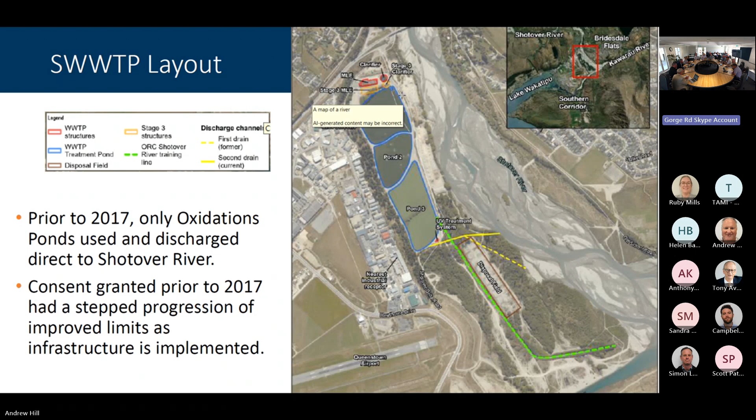In terms of the upgrades in recent years, there was considerable investment from QLDC starting back in 2017 or before, with stage 1: the modified Ludzack-Ettinger activated sludge process - I'll refer to that as MLE from now on, and the older one since 2017 we'll call MLE1. Constructed in 2017, the idea was that it would process about 80% of the town's wastewater through that MLE process.

The remaining 20% went through the oxidation ponds, then they'd get blended at the end prior to UV treatment and disposal. Stage 2 was the dose and drain disposal field - that's the field that failed and was diverted earlier this year. It came online approximately 2019, with the idea being that the treated wastewater was disposed through that field as a land discharge.

Stage 3 has recently finished, or the main parts have just finished - that's the second MLE, the one in parallel that you see there now. Now that it's done, 100% of the wastewater for the region will go through either of those MLEs. It's designed out to a 2048 population forecast, and shown in green is the construction cost investment.

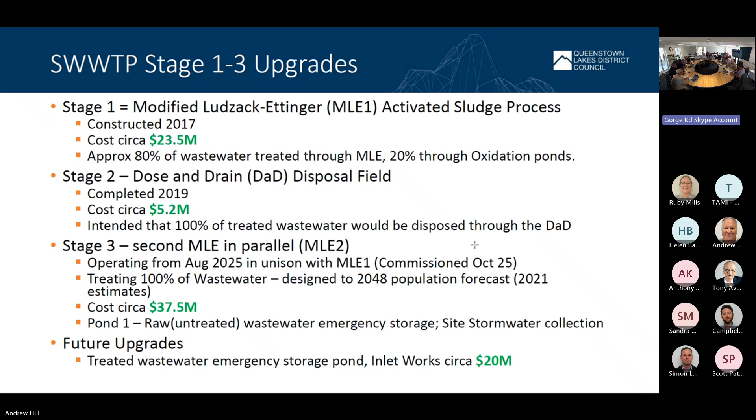There's also, as well as the disposal project, money set aside for future upgrades. One of those is a treated wastewater storage pond, often referred to as a calamity pond, and also some upgrades to the inlet works there. I'll talk a little bit about that emergency storage pond later as well.

Really to give everyone, again, a 101 about the process. So the raw wastewater comes in on the left-hand side. There is an inlet screen, which is off the picture here, which essentially gets rid of the big stuff out of the process. It then puts it into the reactor, and then you have two separate tanks there.

One of those essentially starves all the matter in there of oxygen, and that forces various breakdown and chemical reactions to occur, and then it moves into a stage where essentially an oversupply of oxygen, which then further influences that biological process. Think of it as a sort of a living organism that's got stuff moving around all of it, and then at one point you're depriving it of oxygen, so it gets really hungry, and the next minute you're oversupplying it, and it just goes kind of crazy in terms of eating.

So it's a living organism in that way, and the whole idea of it, when it gets to that clarifier tank, is that that biomass, the living organism, has essentially soaked up the majority of all the solids and that type of thing in there, and then that sinks to the bottom and allows in that clarifier all the remaining treated wastewater to be taken off the top. That then goes through a UV treatment, which is sort of a final element of disinfection, prior to it then being discharged to whichever the appropriate sort of discharge is there.

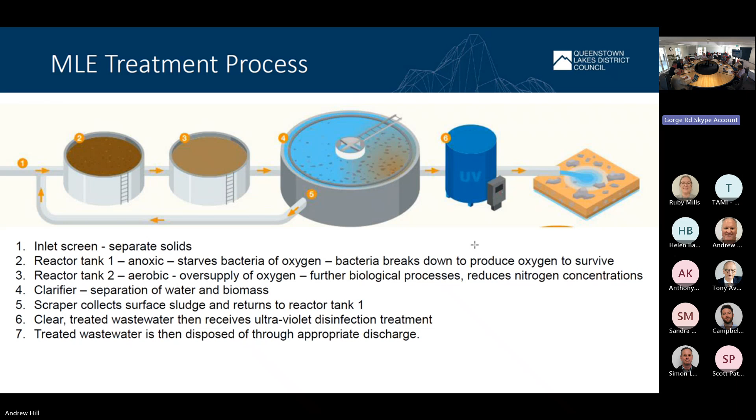Couple of photos there. On the left-hand side is that MLE2, I think this was taken as part of the commissioning there. You can actually see in those chambers, the first ones, there's not a lot of air, not a lot of bubbles in that, and then those subsequent chambers, that's where the oxygen is introduced. The large circular areas at the end are the clarifier tanks where that final stage of the process works.

On the right-hand side there, we've got a quick schematic. That's the old pond one, so it's just to the Kawarau River side of the two MLEs. The left-hand side of that is being established, and this work's still ongoing, as a raw wastewater emergency storage or calamity pond. Essentially, if you've got a fault at the plant and the plant can't process the raw wastewater coming in, that allows a diversion to be held in there for a certain period of time, and then it'll get pumped back through the plant once it comes back online.

The right-hand side is being set up as a stormwater catchment. There's a lot of stormwater that comes off sort of Frankton Road and Glenda Drive and that into the site, as I understand it. So that's been set up to capture that and allow that to drain away.

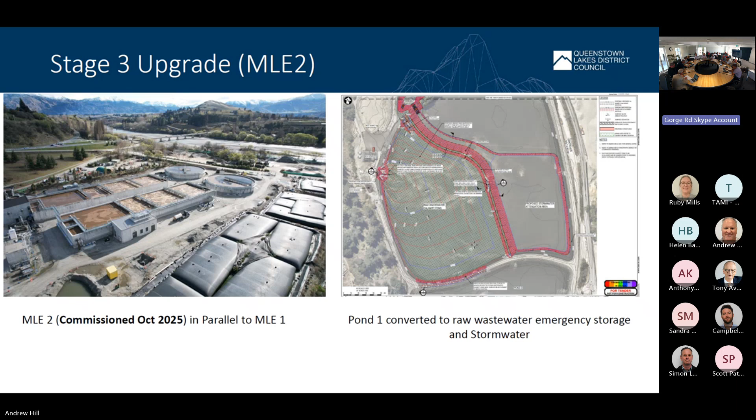A lot of numbers in here, and I'm not wanting to go into detail around them, but I guess what this is trying to show is the improvements in the discharge requirements as we've introduced new infrastructure over the years. So prior to 2017, as I say, it was oxidation ponds and going to the Shotover. From 2017 to 2025, that increased or essentially improved standards there in terms of volumes and elements of nutrients and that sort of thing.

And then another step change from 2025 to 2030, which is when the second MLE comes online again. For 2031, we were looking at that in terms of the potential new improvements that we think we could possibly get going forward as well. We obviously still need to do a bit of work on that with the final options.

I guess the key thing here I'm wanting to show is that the improvements in the discharge quality really come from investment in the treatment process itself, rather than the disposal process. The disposal is really about returning the treated wastewater, or the remaining water, to the environment where it essentially originated from.

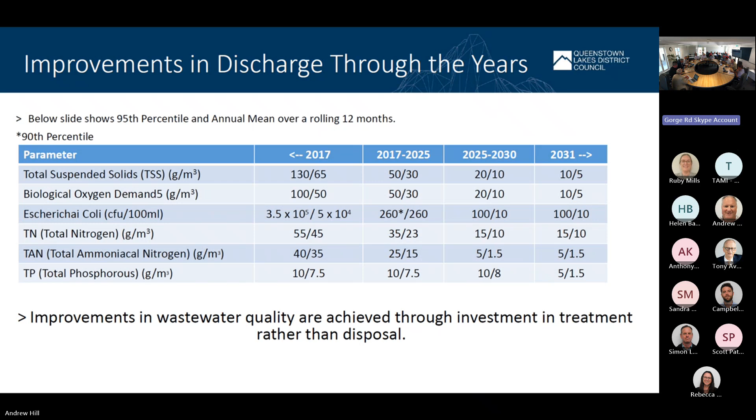Next, we're going to talk a little bit about the old disposal field, the failed disposal field. We'll talk through emergency enforcement order and emergency discharge. The old disposal field is referred to as a dose and drain disposal field.

The picture on the left-hand side shows what it's made up of: a series of buried plastic chambers, about 11 of them down the delta, with the idea that treated wastewater is dosed into each of those chambers and then allowed to drain away through the riverbed into the groundwater, eventually finding its pathway out to what we believe is the Kawarau River.

The idea behind it was that it would be fully buried. The picture on the right-hand side shows it shortly after construction, where all you can see above it is a couple of standpipes and manhole covers. What it's actually made up of is these plastic chambers buried under the ground that allow the treated wastewater to be dosed into them. The idea is that you dose them, then allow time for them to dissipate and essentially rest.

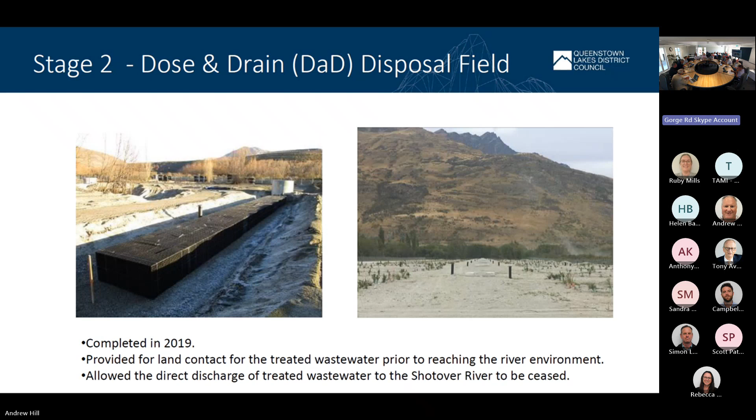The challenges that really came about, and the reasons why we believe it failed: one is that in this area, there's not a lot between the actual disposal field and the groundwater. There's quite a high groundwater table there, so there's not a lot of capacity for the treated wastewater to soak away into the ground.

The second thing is around those buried plastic elements—there's very little access for maintenance. So what kind of happened is a lot of the fine, dusty materials on the riverbed got clogged up, and that, combined with some of the suspended solids out of the treated wastewater, just bound up and left a gluggy layer of stuff that prevented the treated wastewater from draining away through the disposal field.

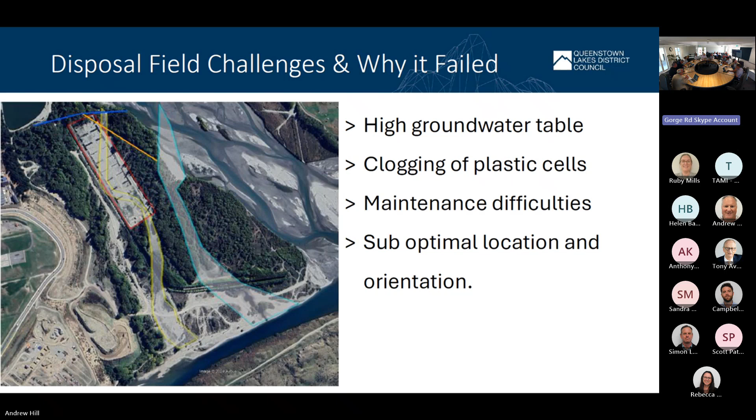If you want to speed up, we're going to run out of time. Yeah, run through—maybe let's do the past more than the future. Yeah, let's take them as read. Quickly skim, and we'll come back to any questions if that's okay. We've got, obviously, we will not make it through.

Disposal field challenges—as I say, we've talked through a few of those. We don't think that the actual old disposal field is able to be reused. Its capacity is so limited that we don't think it's viable as a long-term solution.

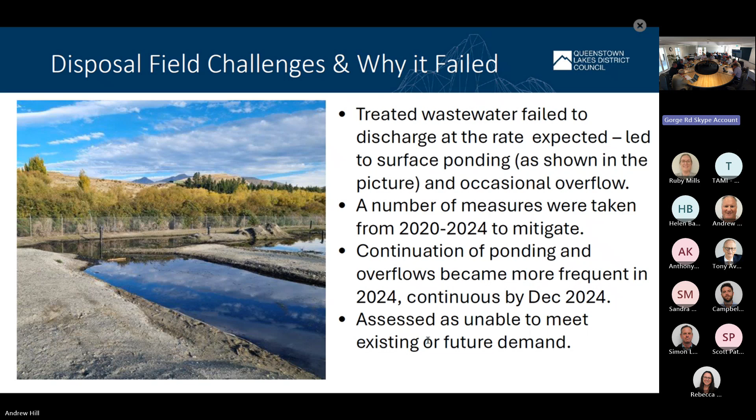As part of that, and even before that, we are undertaking our own sampling of groundwater and surface water on the delta, and that information is available on the QLDC website. A snapshot of that is up there.

This is really good. I think it shows where the line essentially drops flat and runs along. That was the implementation of the MLE2.

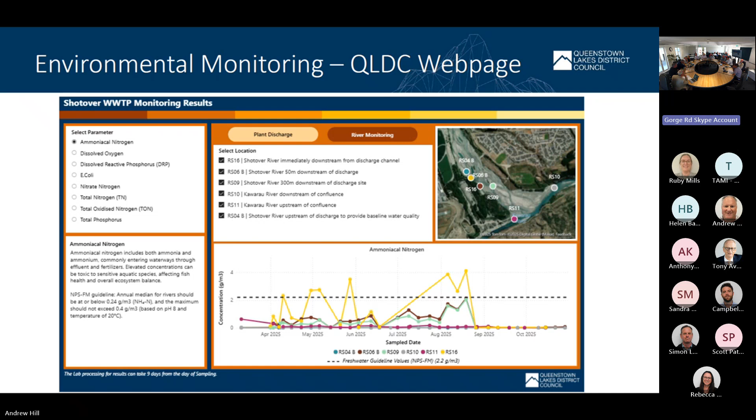Emergency works, no surprises. The chief executive signed off on that the 27th of March. Due to the failure of that and an increasing aviation or bird strike risk, the emergency works commenced 31st of March, and we're now undergoing a resource consent process for that. It's been publicly notified and likely an Environment Court hearing in the new year.

There are 2 resource consents being sought there. One is for the actual discharge. The second is for a diverter minor channel. I just want to be clear on that. It is simply what's shown in the left-hand image there, an excavator scraping back to divert a small portion, about 2 to 2.5 cubic metres per second, and that aids with the mixing past the discharge area.

So the far right-hand side of that orange line is where the treated wastewater discharges into the Shotover, and the key thing there is to try and enhance that mixing at that point of discharge.

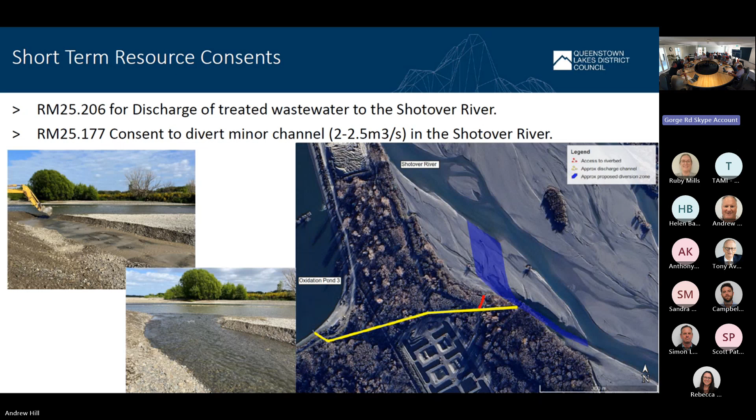Right, questions on basically anything we've covered thus far? No, we're short of time.

But back in the recommending report, when this field was actually dealt with by the ORC before it got its consent, that report says the disposal field is designed to provide for expansion which will occur in response to how well the field is coping with flows and to address projected increases in discharges over time. It is the applicant's stated intention to monitor groundwater mounding and treat this initial disposal field as a full working trial in order to set design parameters for future expansion. What happened to that?

So I guess my understanding of the planned expansion was to expand further to the south, which would just continue to exacerbate the issue. So from the work that we have done subsequently, there appears to be flaws in the original thinking around that disposal field and how it would have been expanded.

And have we done any soakage tests on the field? So now it's drained, have we thought about potentially remediating one of the cells, blocking it off, doing a soakage test? We haven't undertaken any soakage testing since the field's been commissioned, but we have worked with our experts to understand what the capacity of that area would look like, and that was one of the long-listed options considered, which hasn't been deemed an appropriate or sustainable long-term solution.

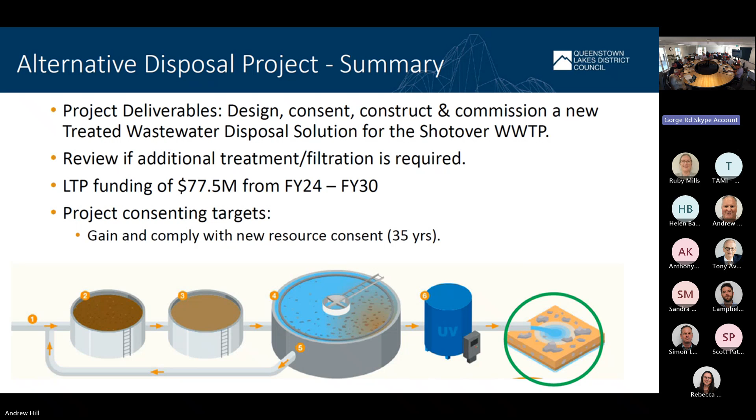Continue - great, thanks all. So looking at the next stage, it's around our long list options for the alternate disposal work. Really, as it notes there, this project is looking at the long-term disposal solution for the Shotover wastewater treatment plant. As part of that disposal solution, we're also considering if additional treatment or filtration is required to meet varying consent standards. The LTP has funding allocated of 77.5 million, as it notes there, and what we're seeking out of this is a 35-year consent, which is the industry standard under the new legislation.

This next slide just shows that we've started as wide as we can in terms of our analysis of options - the gap analysis and determining a basis of design. We went through a wide options assessment in the early stages late last year, which narrowed it down to 13 options on our long list. Essentially there was 8, with some sub-options of each. That occurred up until April, when we had our workshop and then presented to the council.

Since that time, we've been working through our shortlist options analysis of those 5 options, delving into them in much more detail to really understand the nuts and bolts of what they may or may not look like, and if they're achievable. From October of this year, we've had our analysis workshop within the project team, which has scored all of those shortlist options, and we're now working through a process to identify a preferred option, with the target being to have that confirmed by March.

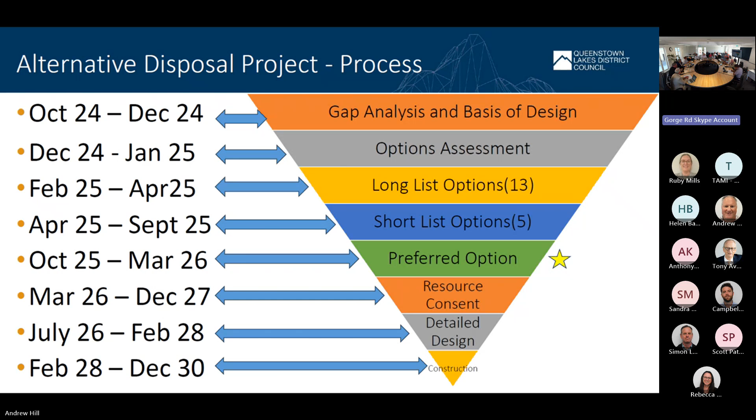We then need to go into that resource consent timeline, and we've got a reasonable amount of time to undertake that resource consent. We're planning that we may need to go through a fair bit of a process with that, which we can talk about a little bit later. From there, a lot of these activities are happening in parallel. We go through the detailed design of that consented option, and then construction, with it being in place by December 30, is the process we're trying to follow overall.

We asked a little bit further about population forecasts that we're looking at. So these are the updated forecasts, the key numbers we're now working on out to that future 2060 number, compared to recent population projections. So essentially, we're looking at a doubling, or slightly more than a doubling, of everything over the course of the next 35 years in terms of the numbers.

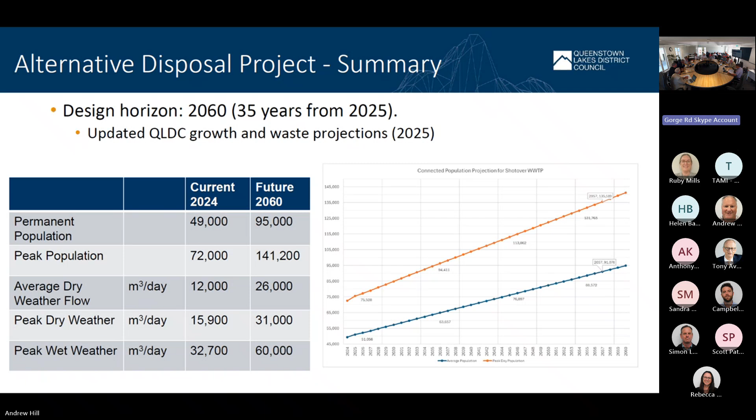Just to put that into context, our current average dry weather flow is 12,000 metre cubed a day. That's the equivalent of around 5 Olympic-sized swimming pools per day of actual treated wastewater we're discharging. That will go up to 10.5 Olympic-sized swimming pools at our 2060 average daily dry weather flow.

And to bring it back to a point you raised earlier, the current treatment capacity sits somewhere in the middle. So there will need to be an increase in that treatment capacity sometime between now and 2060 to plan for those numbers.

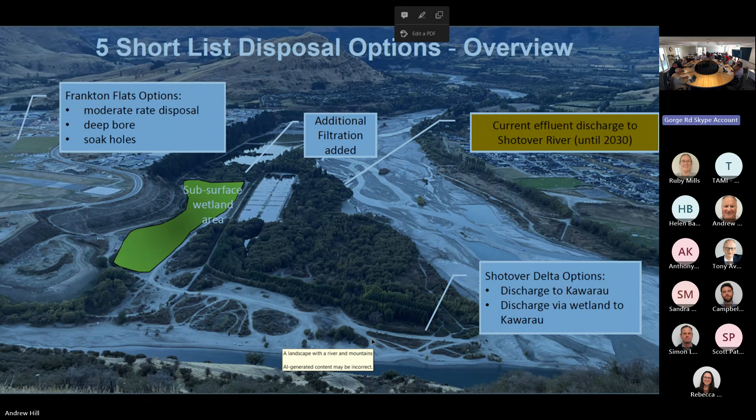I can go through that a little bit later if you like. Are there any questions on the long-term disposal, the long list options? A couple of questions, if I can jump in.

Just going back to the flows. So we're looking at the peak wet day flow being doubling the peak dry flow. Is that because we're treating stormwater, or because people use more water when it's raining, or because we've got 100% infiltration and inflow? That is an allowance for normal practice, I&I, so infiltration and inflow. So with that, it's still relatively low.

So the reality is we've got twice the amount of volume to manage. That's not the current performance. We are fortunate that the network's relatively young, but it will age, and typically it will get worse. We will obviously do everything we can to continue to renew and invest in managing I&I, but the responsible thing to do is to make a reasonable allowance based on industry norms.

Just following on from that, as the plant operators would tell you, having a consistent quality of influent is pretty key to safe operating of the plant. So if we're having very variable influent when it rains, that has its challenges. What's our response to that?

The plants are designed to manage the peak flows that come through with wet weather. Whilst wet weather generates higher hydraulic flows through the plant, that's at a lower load because it's more dilute, so that takes some of the pressure off. The more significant challenge for a district like ours is the peak populations that come in as a step change, such as for Christmas and New Year and certain holiday periods in the ski season. They are more challenging because they are genuine additional load on the treatment plant, which requires more careful management.

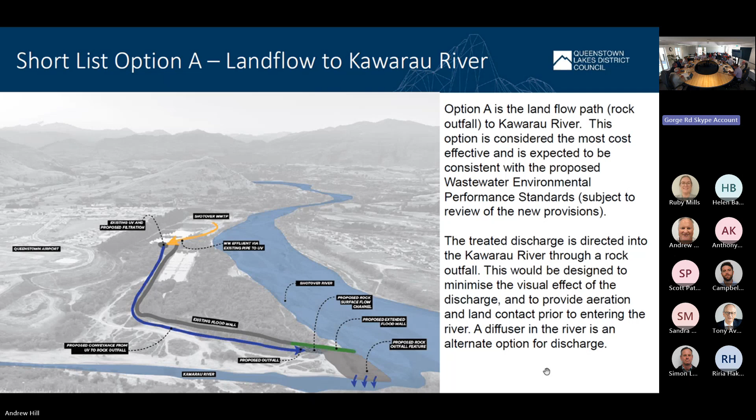But essentially, you won't see any water on top, that's how it's designed. It's essentially a lined wetland, so it's not designed for the water to soak through it into the ground. It's designed for the treated wastewater to pass through on a horizontal basis.

It's filled with gravel material that allows a certain volume to go through, and it's got plants in it that can draw nutrients from the water that passes through. We've talked specifically around designing it in a way that doesn't attract birds, for airport risks, or insects that would then attract birds. So specifically, and we're only at concept design at this stage, it's around avoiding surface water and avoiding attracting any birds into that area.

So careful selection of the plant species becomes important, for providing treatment. I guess the nutrient levels in the discharge mean there's not a lot of nutrients for the plants to take up, so you wouldn't expect any significant difference. It's more for providing some kind of land contact. But the water's still going to go out the other end, and it's still going to go anyway.

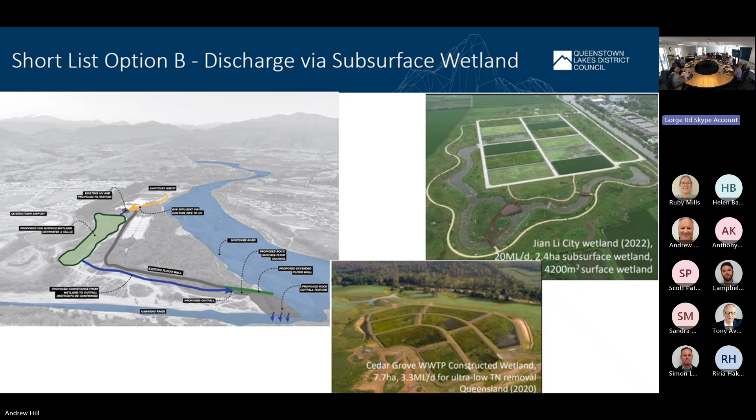So there is a longer term piece of work for our strategy team looking at our strategy for wastewater servicing. We have explored in great detail the opportunities for land discharge across the basin, and they are incredibly limited. Having a whole series of distributed treatment plants doesn't change the land take available and the challenges with the availability and suitability of that land. A huge swathe of the basin is within the Lake Hayes catchment, and that's basically unable to be used because it's already got a zero threshold for nutrients.

So beyond 2060 then, how much wastewater are we considering might be pumped into that river? I'm not sure. If we go down this route now, we sort of potentially lock ourselves in while we're doing a piece of long-term strategic work.

So maybe I can try and answer that. The two MLE plants that are now online are designed to get to '48—not 2048, it will be less than that. We need to be able to dispose of the treated effluent; this is what this disposal process is about. There are very few options for that. We are doing more work around the longer term wastewater needs across the district, but we're still going to need plants that deal with our current load.

Whether we extend the treatment at this particular site and continue to centralise is a question we're working through—we've got some time to work that through. This process is about making sure we're able to dispose of the current flow that we know is going to hit that plant. There's another bit of work looking at the broader question. We've also got a number of developers proposing to do their own treatment based on their own needs in various locations around the district; we're working that through. So whether we continue to bring all of that into the central location or do more dispersed treatments, we're still working through. But to be clear, we need to get this sorted so we've got capacity at this site out to 2048. Sooner than that, that's what this process is about.

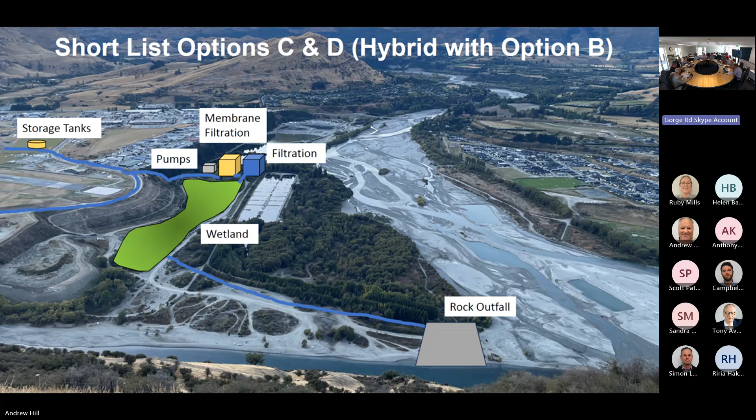We need to do those investigations, proof of concept, before we fully invest into them. So option C and D both look like this, with option B being constructed up front, and then the infrastructure being taken up to Frankton Flats, including additional membrane filtration, pumps and storage tanks up there. Even that is undertaken as a staged process, which I'll go through shortly. But that's how option C and D, when we've assessed it, is a hybrid of B and either C or D.

Can I ask a quick question? The filtration and stuff that you've got in this picture, is that assumed for option A as well? Yes, the membrane filtration, which is additional, is for option C and D only. Why could we not put that into option A? What's the reason, down the track?

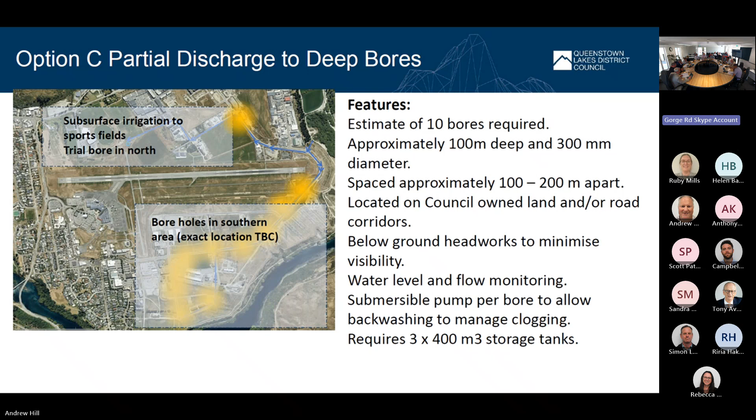So option C is the deep bores. Once, imagine the previous slide, it gets it up onto Frankton Flats. We believe we can utilise the council-owned land corridors and that type of thing around there, looking at a total of 10 bores, each at a depth of roughly 100 metres. Essentially, eventually, to make this work, you'd need 3 large storage tanks up there. Once the treated wastewater has gone through that additional membrane filtration, it's stored up there and then dosed down each of these bores. The reason for 10 bores is that some of them can be offline to allow those to rest as well.

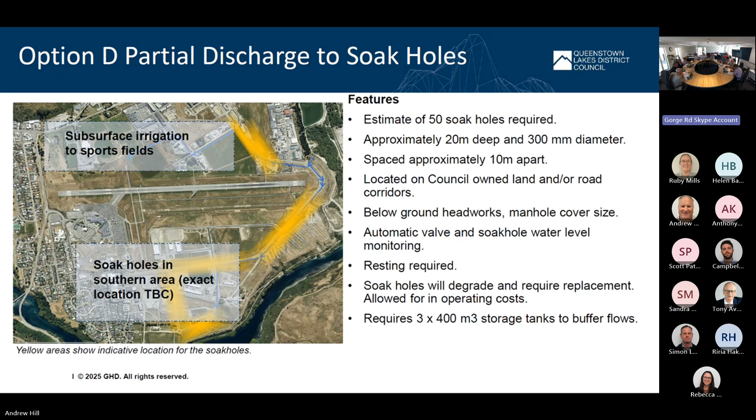Option D is very similar, except it's using the soak holes. The difference is the soak hole only goes down about 20 metres, and as I said before, it then lets the wastewater drain away and percolate. Because of that, the capacity of each soak hole is less than the bore, so we need more of them. The analysis and costing we've done is based on 50 soak holes. You could do more to get greater quantity, but you've still got that head of the aquifer capacity we need to consider. Similar type arrangement there though. We think all of that can go into the roading corridors without the need for land, except maybe the space for those storage tanks, which may be the only element where land is required.

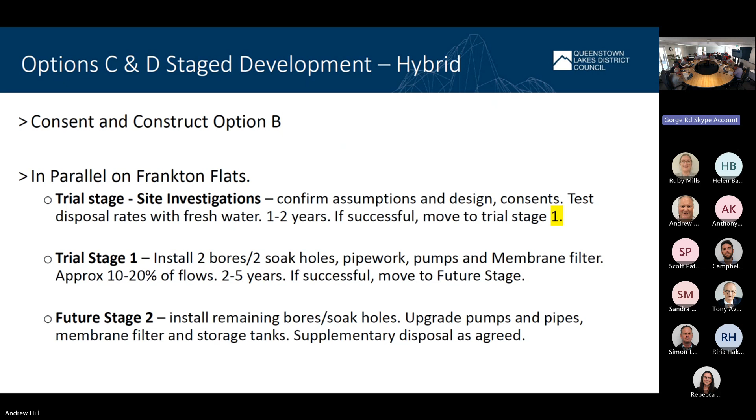If that's successful, then move to stage 1, which would be starting to build some of that infrastructure I showed you in that earlier slide to get it from the delta up onto Frankton Flats. Looking at perhaps 2 bores, 2 to maybe 5 soak holes, and then essentially doing a proof of concept up there before, and again, if that proves successful, moving to that future stage of the full componentry. So that's how we see that flowing if option C or D were progressed.

You'd still have to invest in the pump station, right? Yeah, and I think between those 2 stages, there's a smaller one, or I think it's a second one in parallel added for the later stage. Yeah, but I guess that investment at trial stage 1 is significant. Yeah, it is.

An overarching assessment of the environmental impacts for all options, noting that all options on the shortlist now include some form of discharge to the Kawarau. A key highlight is that once mixing occurs, there won't be too much variance between them environmentally.

There's very little improvement in nutrient concentrations achieved from the failed DADs, particularly in some of the nitrogen and ammonia we put in at the top end of the DAD, we're seeing the same stuff coming out along the Kawarau River. This suggests that land disposal as we've currently known it has very limited benefits in terms of those nutrients.

Certainly for the polishing of any remaining suspended solids, the disposal field would reduce the virus load in the treated wastewater. Viruses are one of the things with pretty limited treatment in dealing with, so that's one of the main risks, and why there's a need to ensure adequate mixing with the treated wastewater once disposed into the receiving environment.

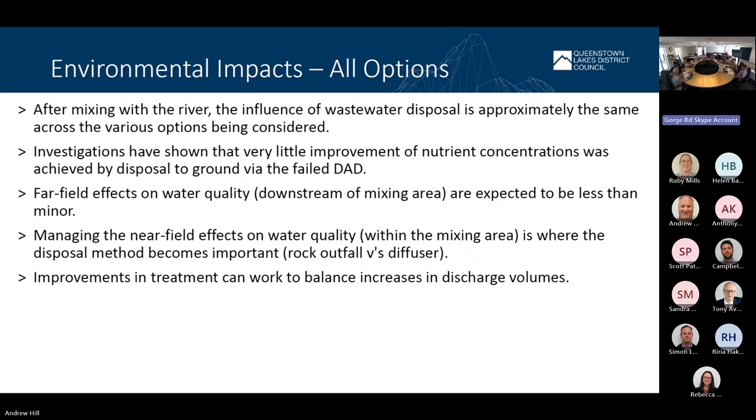Near field effects are stuff close to the discharge point. How the impact plays out really depends on how we get the treated wastewater into the receiving environment, whether through outfall or diffuser options, or through the land. There are some improvements in treatment we can use to balance the increases in discharge volumes over time.

We've talked before about the cultural side of things, and Mayor Glover referred to elements of the iwi position statement. I wanted to cover this off briefly. We've had a really strong working relationship with the iwi representatives from both Te Ao Marama and Aukaha right back from late last year. They've worked with us to understand the options and provide clear feedback from their perspective.

Iwi are very clear that they don't support a discharge to water, and they consider anything on the delta as being that discharge to water. When it became evident that none of the options in the shortlist would avoid some form of discharge to water, the iwi representatives confirmed their position and withdrew themselves from the final option scoring we undertook in October. We'll get onto that shortly, but they refrained from being involved in that.

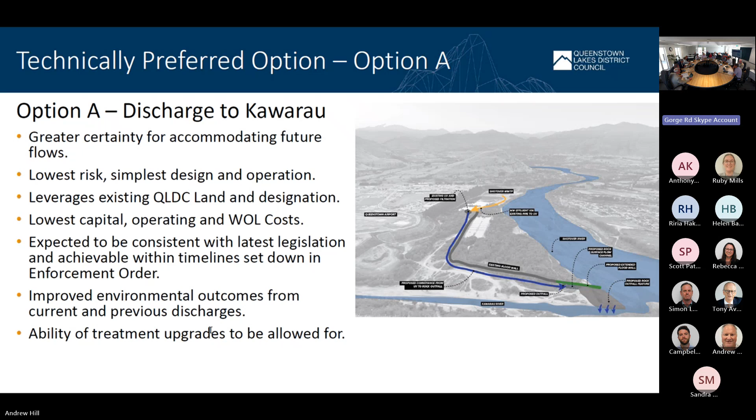Okay, sorry. Quick question. What's the arithmetic around the development contributions and indicative rates impact that you've got two slides previous?

In other words, how do you come up with $400 for option D? I'm trying to divide that into the number of projected people. It's projected by 2061 that will be 200,000 people. Okay, rather than answer that in detail, just broadly, tell me how did you come up with those numbers?

The finance team have got a template that we put in, the likely capital and operating costs over the 30-year life of the project, and it comes out with... This assumes a static population or a growing population? Growing population. Right, thank you.

Without going too deep, it does raise the question of how much of this can we put on growth-related costs. There is no compliant solution at the moment, this is a level of service question to bring everybody up to speed, but that may not have occurred had we not had the pressures of growth. So I think there is an argument. There is still significant growth. It's roughly 50-50 in terms of growth and level of service.

No, it needs to be more than that. We need to stop and wait a bit. Most of it goes on growth. It needs to be defensible, but it's probably not the right split. No, if we can take that away, I think Catherine should pick it up.

I'm sorry, really conscious of time. We've got 7 minutes to try and get through this.

So if we're looking at going forward, there's a slide we haven't got to yet that talks about community engagement starting on the 25th of January. Bear in mind the intangibles we've talked about. How do we do community engagement when we don't know what we are allowed and will be allowed to put into the river? Because we can't.